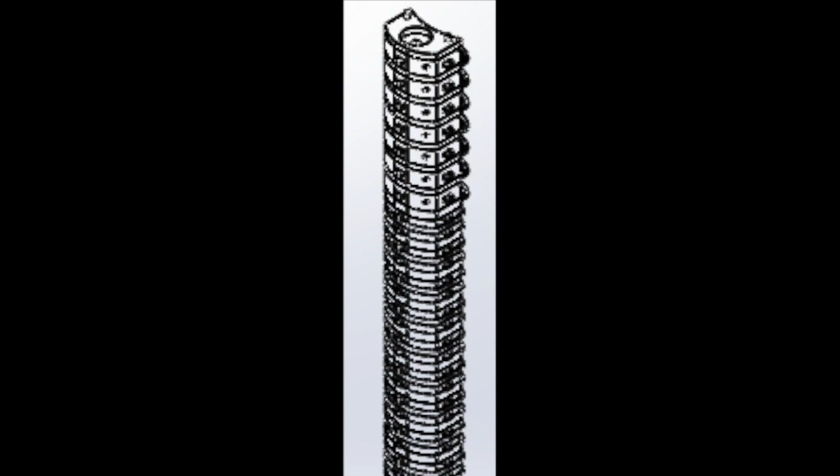Over the past 9 months, this design team has taken on the task of designing and manufacturing a biomechanical exoskeleton for Dr. Yusuf to use in his lab. The objective of this project was to develop a multi-degree of freedom research platform of an exoskeleton system, which will allow future research of the experimental mechanics laboratory.

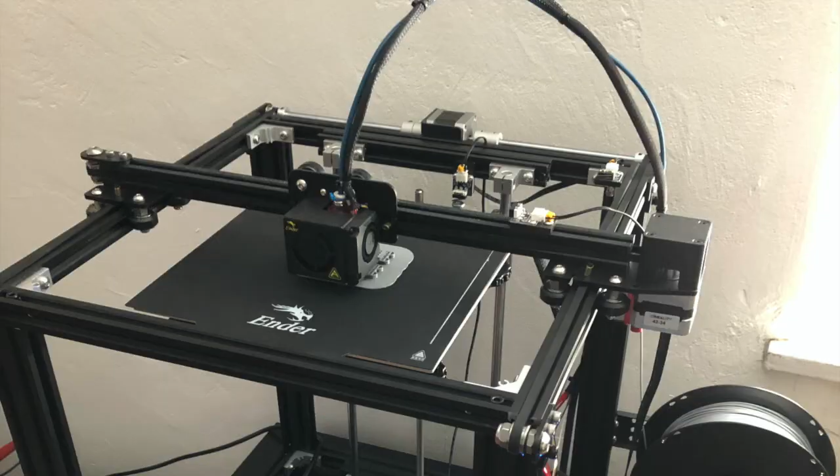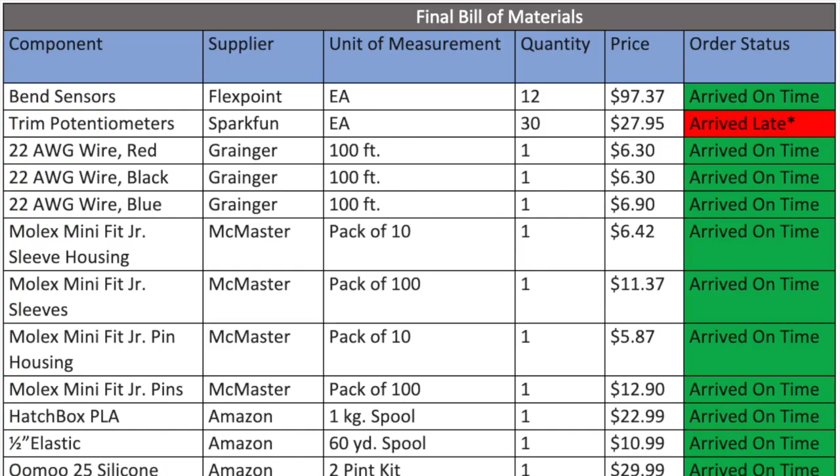We were expected to design, manufacture, and test an exoskeleton system to demonstrate its functionality and technical flexibility for future biomechanics-based research. Dr. Yusuf gave us a budget of $500, and because a device like this had never really been built before, we had a lot of research and planning to do.

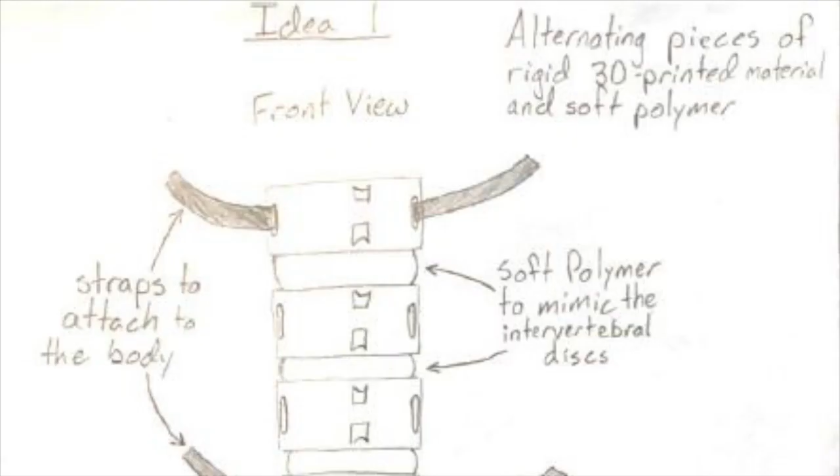We came up with a few designs involving soft polymers and elastic before settling on a design that mimics the biology of the actual spine. The final design alternates hard plastic vertebrae with flexible silicone discs. As far as the electronics are concerned, we decided a design using bend sensors and potentiometers would be best for our timeline and budget. There are 7 requirements for this system.

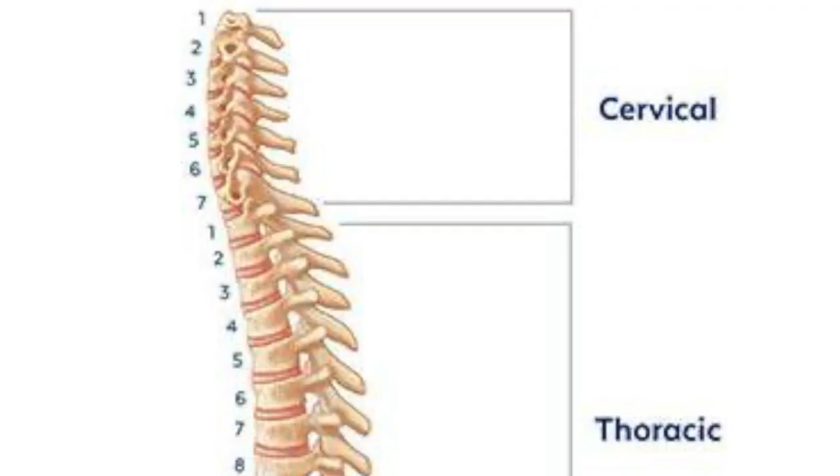Requirement 1. The device must collect data from a majority of the spine. To fulfill this, we decided our device will extend from vertebra C1 below the skull to L5, directly above the hips. Requirement 2. Design of the exoskeleton shall allow for acceptable portability and accessibility. This requirement is very broad and includes needing the exoskeleton to fit 90% of college males, take less than an hour to set up, and weigh less than 25 kilograms.

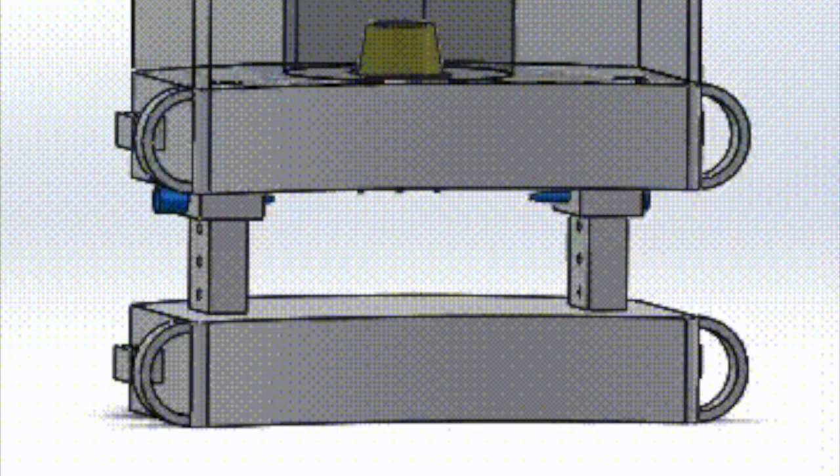In order to make the exoskeleton fit our target population, almost every part of it is adjustable. 19 of the 26 vertebrae can change height using a pin system, and each strap is adjustable in at least one spot. Once the exoskeleton's height is adjusted, it will take almost no time to set up, as it just needs to be put on and buckled. Because the entire system is mainly made of plastic and silicone, the weight limit was easily attainable.

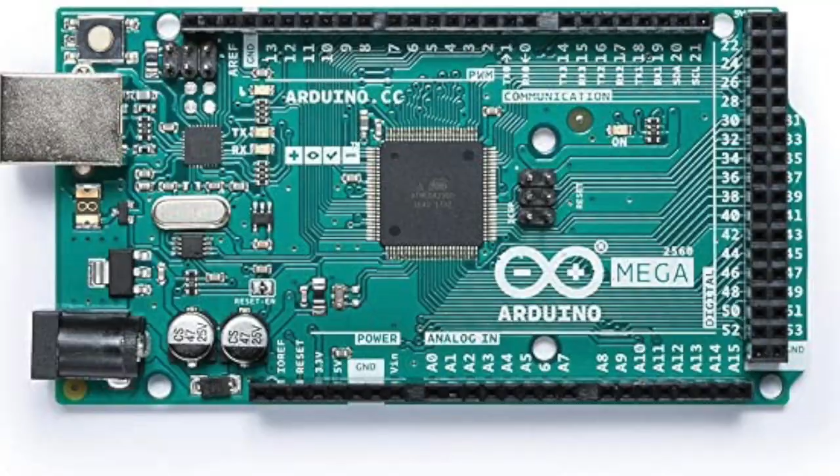Requirement 3. The exoskeleton shall collect data and output it in a sensible format. Because the bend sensors do not directly output information on the forces of the spine, an Arduino had to be incorporated with code to convert the bending data to a force. Requirement 4. The exoskeleton has to output values that make sense. Dr. Yusuf informed us that our device should output numbers within 10% of what is found in literature.

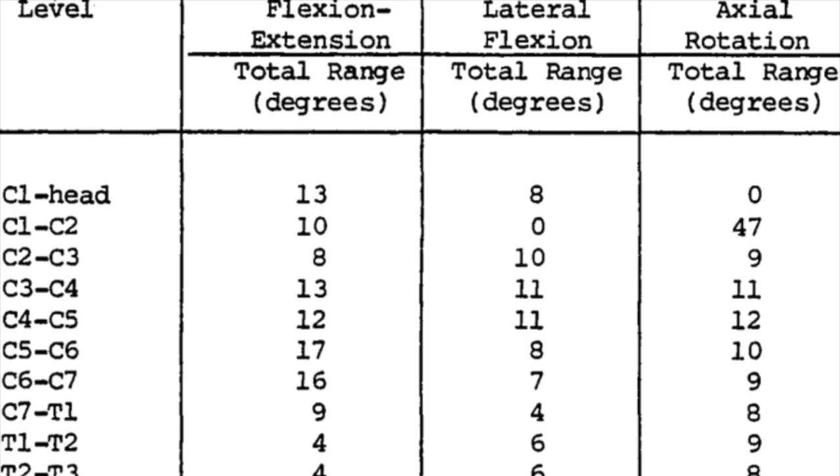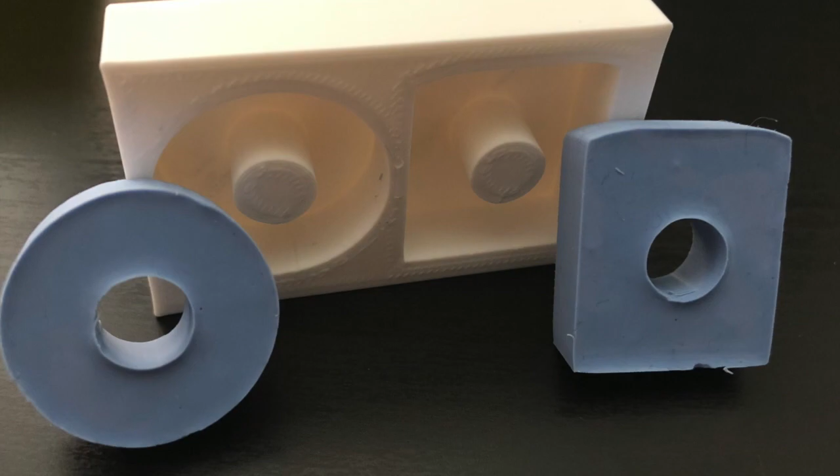Requirement 5. The exoskeleton shall not hinder the nominal ranges of motion for human movement. In order to satisfy this requirement, we had to ensure that each portion of the spine was able to move in the same ranges of motion as the normal spine. This ended up being between 10 and 30 degrees of flexion. For rotation, the lower spine needed about 10 degrees and the neck required up to 45. After many iterations of silicone disc design and ratio, we decided on a donut-like shape that did not reach the edge of the vertebrae on either side with a 2-to-1 ratio of silicone.

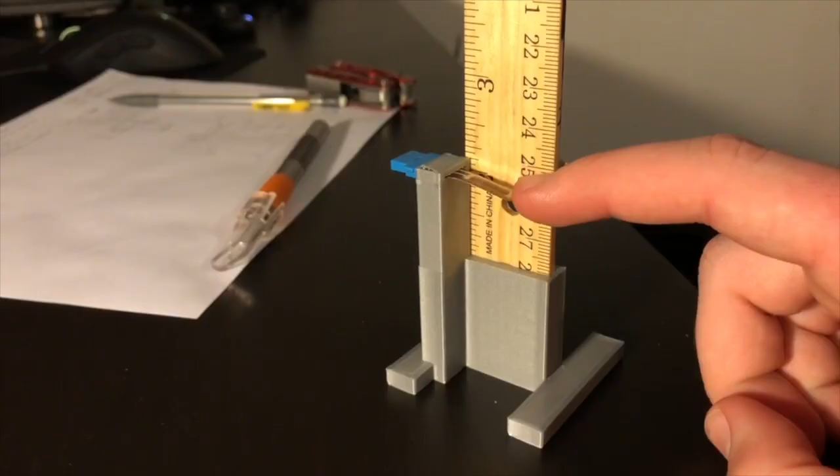Requirement 6. The exoskeleton shall output to a single source for ease of use. We decided on an Arduino Mega to fulfill this requirement. While the device is in use, 10 sensors at a time can be connected to the Arduino and transmitting information. There are 5 bend sensors that can be placed anywhere in the exoskeleton, and the potentiometers can be chosen by switching out the Molex connectors in the electrical box.

Requirement 7. The exoskeleton shall operate on a power source that does not compromise the integrity of the internal electronics and be able to run for at least 1 hour without being connected to a power supply. A 5-volt battery is plenty of power for both of these.

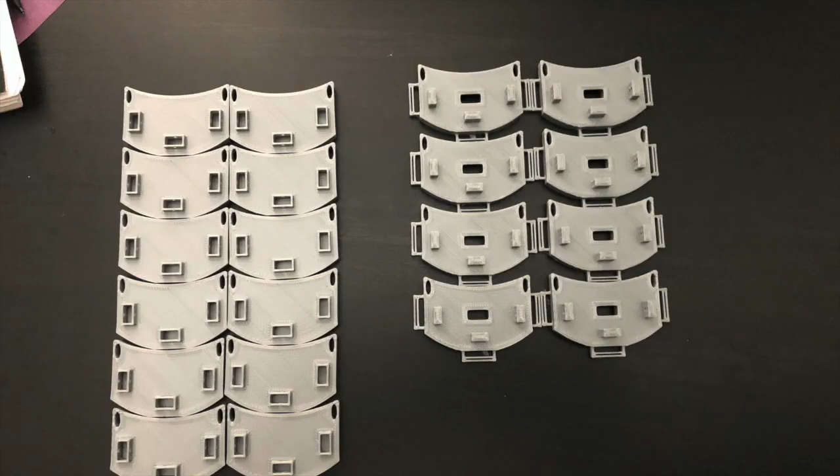Manufacturing this project ended up being more work than we were anticipating. Each section of the manufacturing involved very different processes. The 19 vertebrae that changed height needed to be printed in 2 halves, and the remaining 7 cervical vertebrae were printed as 1 unit. The prints ran for a total of about 40 hours.

Each disc was cast using an elliptical donut-shaped mold so that the potentiometers could be placed in the center of the discs. We used OOMOO 30 silicone at a ratio of 1 part A to 2 parts B to achieve the desired flexibility in each disc. After curing for 6 hours, the discs were complete.

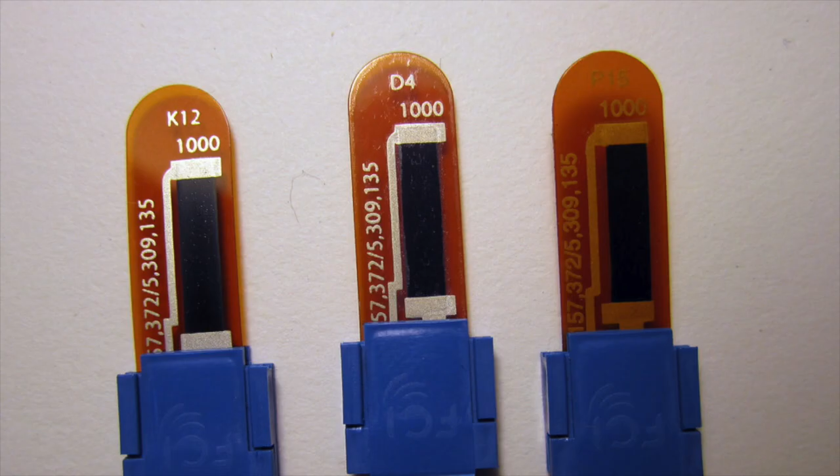The bend sensors are not permanently attached to the exoskeleton, so their assembly simply involves soldering the wires to the sensor, applying the heat shrink, cutting the wire to length, and crimping the end to the Molex sleeve.

The potentiometers are a little more complicated because they need to be surrounded by the silicone discs. Before gluing each disc in place, the potentiometer needs to be positioned in its hole in the vertebra and have the appropriate length rubber hose secured on so it can sense the rotation of the vertebra above it. Then, the disc can be glued on its surrounding vertebrae, and after drying for 24 hours, it is ready to go.

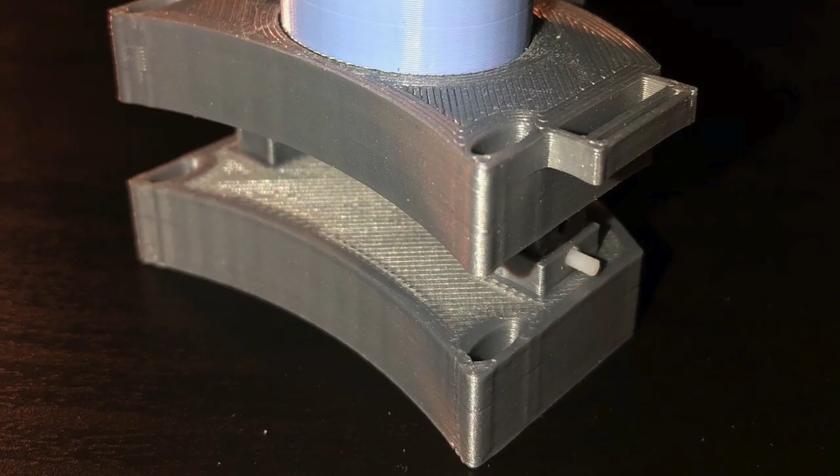In order to read the values given by the sensors, we wrote a code that plots the time in seconds against the position of the sensor while transferring all this data to an SD card. The SD card then outputs all the data to an Excel sheet. From the Excel sheet, we can use formulas to convert the position to the appropriate force.

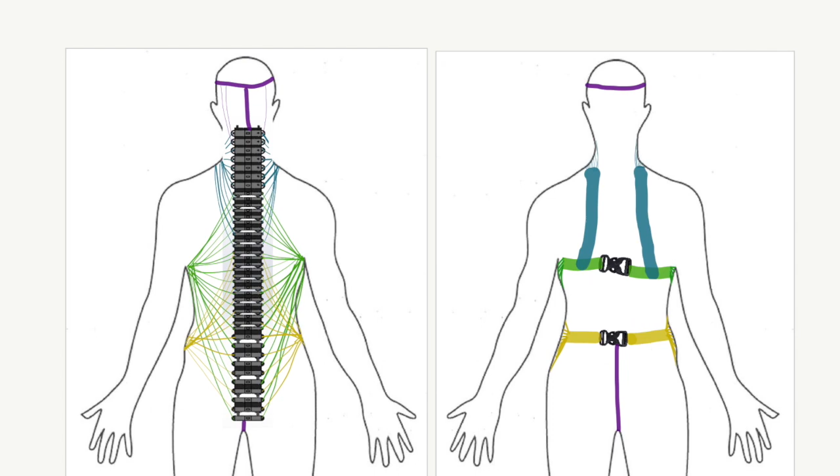In order to attach the exoskeleton to the body, a strapping system using cotton and elastic was designed. The elastic keeps the exoskeleton pressed against the body, while the cotton pulls the exoskeleton as the body moves. After the entire exoskeleton was assembled, individual straps were cut to length and sewed into place. There are buckles attached to each strap on the front of the body so large adjustments can be made, and each cotton strap has a strip of Velcro so that finer adjustments can be made for a snug fit on each person.

After almost 9 months of work, we have a fully functioning biomechanical exoskeleton that can sense flexion and rotation along the length of the entire spine.